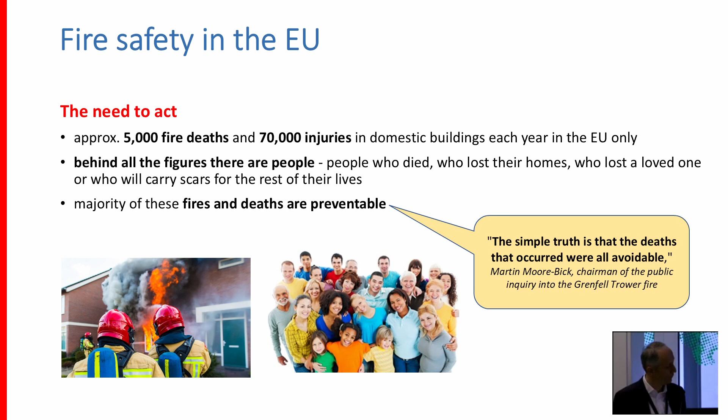Okay, and now I'm going to focus on only a few challenges, but they are, I could say, real game changers.

The first one, energy transition. Of course, energy transition brings a lot of benefits to all of us. Sometimes we are not even fully aware that we benefit from this process. But at the same time, it brings new and sometimes changed fire risks. And it's not difficult to imagine what would happen if we install, for example, PV panels, EV charging points, heat pumps, energy storage systems in our house, and it's installed by an incompetent installer, and connected to electrical installation that is obsolete and not totally adapted to these purposes. Probably it's not difficult to guess what will happen.

Another item, also an element of the energy transition in fact, but I separated it here on purpose: modern methods of construction. New building materials and new construction methods aiming to achieve higher energy performance and sustainability also have an impact on fire dynamics and make the fire environment less predictable. Once again, at this point, there is a really high risk that an energy renovated building will become more dangerous for the people inside it than before the renovation. And in such a situation, the whole process does not make sense.

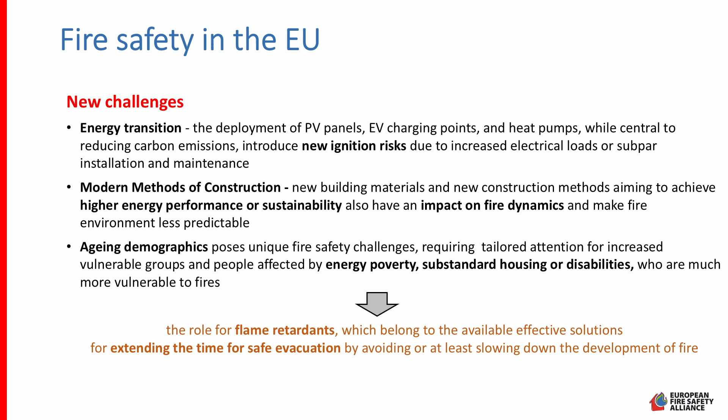And many people ask the question, what can the European Union do to improve fire safety? First of all, we should remember that fire safety is primarily addressed by building codes, and building codes are a national competence, and undoubtedly it should remain like this. Member states should have the right to shape their own regulations on the issue. But what is very important, building codes don't cover many important fire safety aspects, for example fire awareness, some elements of prevention, fire statistics, research, market surveillance, or information exchange.

And based on our experience, we quickly noticed that the EU institutions have both the potential, and should also be interested, to coordinate and support member states, because fire safety impacts and is impacted by several of the EU's core objectives, mainly concerning the energy transition and the new policy on housing, but also tourism, environment, human health, or consumer protection.

European Union institutions offer also a unique perspective which can enrich and strengthen the development of knowledge in the field of fire safety and help to address common challenges across member states, because most challenges and most fire safety problems are in fact common, the same across the European Union.

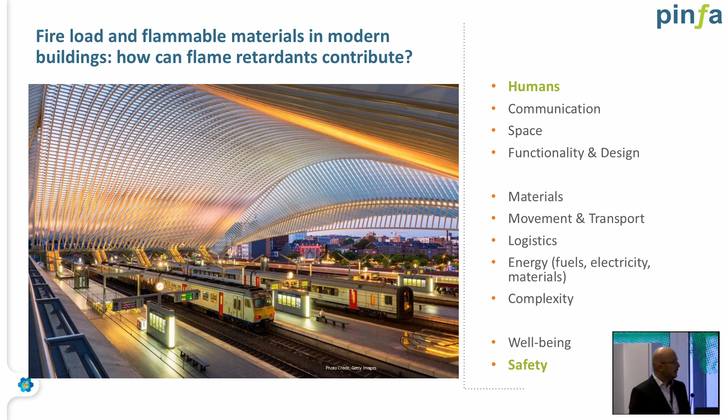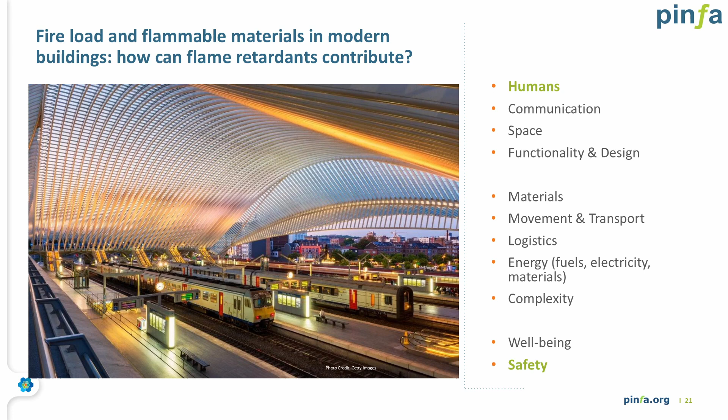We have heard that before: there's fuel, electricity, and burnable materials. So overall, we have high complexity in such a building, but we need to take care of the well-being of people, and we need to take care of safety in such buildings.

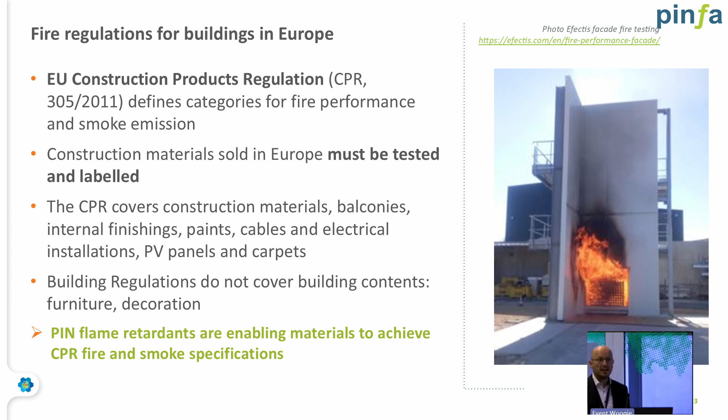But looking at fire regulations for buildings in Europe, we have standards, and that's very good already. It's the EU Construction Products Regulation, and construction materials must be tested and labeled according to this EU Construction Product Regulation. It covers materials like balcony, internal finishing, paints, cables, carpets, and so on. But it does not contain all materials which are present in buildings. And here flame retardants play an important role because these flame retardants are enabling materials to achieve these CPR fire and smoke specifications. To remind you, PIN flame retardants are phosphorus inorganic nitrogen flame retardants.

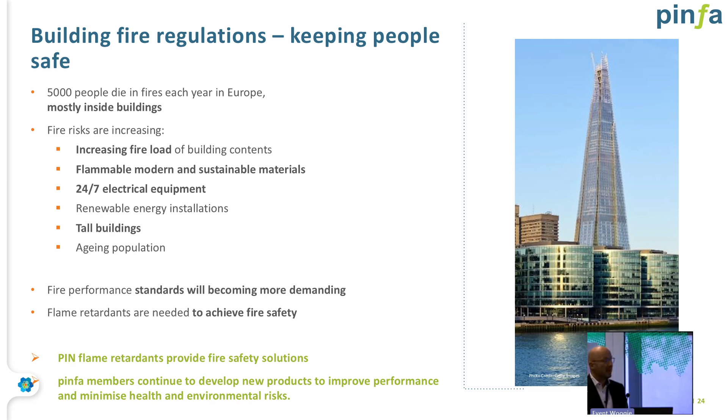Buildings are getting taller, and there's also an aging population. So the fire performance standards need to become more demanding, or will be becoming more demanding. And that's a task also for flame retardants and for the flame retardant producers, to achieve this fire safety with the products developed and provided. PIN flame retardants provide already today such fire safety solutions.

One very important aspect of flame retardants, and we heard that in the presentation before already, is that flame retardants are increasing the time to flash over. This means people have time to discover the fire. They can also alert other people. They can take decisions. They can take own actions to extinguish the fire. So this winning time is a very important role that flame retardants are having. They give the time for people to escape and more time for these activities shown here.

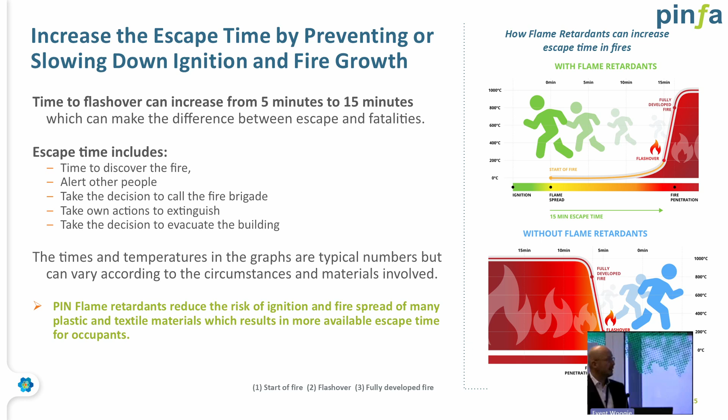PIN flame retardants are reducing the risk of ignition and the fire spread of many plastic materials, also textiles, and that's resulting in more available escape time for the occupants.

And here's a wider summary of why flame retardants play a crucial role in modern buildings. So there is not only the increased escape time, there's also fire prevention and fire control, because flame retardants stop fire or prevent fire from the very first ignition moment. For example, if you have a shortcut in a cable. As well, flame retardants are decreasing the smoke emissions. Smoke is responsible for many fatalities in fires. And it's also very important that flame retardants are reducing the total heat release. And with reducing the heat release, you can also reduce the damage if you have a fire.

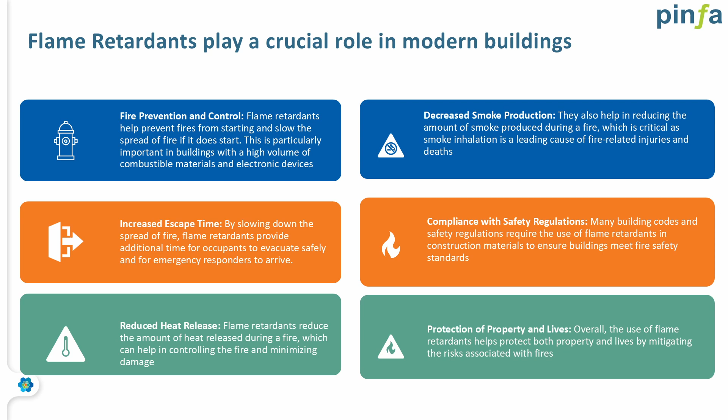The future challenges, we also heard about it: e-mobility, for example, the increased use of electric vehicles, for example, parking garages, or cars which are close to buildings. They are also having certain risks. The digitalization, the growing integration of digital technologies in buildings, demand higher energies. So the consumption of electrical power will raise, and this also will raise the risk for fires.

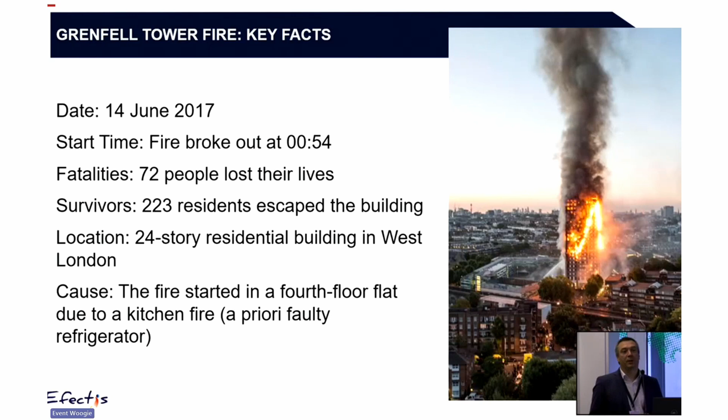The cause is, I will say, a very simple fire in a kitchen—something that may occur in the life of a building, something that may occur in the life of any building. But here, what made it go from something insignificant, a small fire inside an apartment, to a catastrophic fire—the fire started on the 4th floor and spread rapidly to the facade from the exterior. We had the first propagation, a vertical propagation, during 30 minutes.

At the time, imagine each story has 6 apartments, with the same floor plan on every story. At that time we have a column of fire on the facade in a limited part, vertical, and we have no fatality in all these apartments because everybody at home sees the fire on the window and goes out. But afterward, you have a horizontal propagation of this fire, and this horizontal propagation trapped people in their apartments.

We will see why, because it's also a question of materials, a question of penetration of fire, a question of why we had such material on the facade prior to the disaster, but also during the disaster, how it was managed by firefighters. This point is very important because this is the first time I've seen an inquiry that also focuses on the responsibility of firefighters.

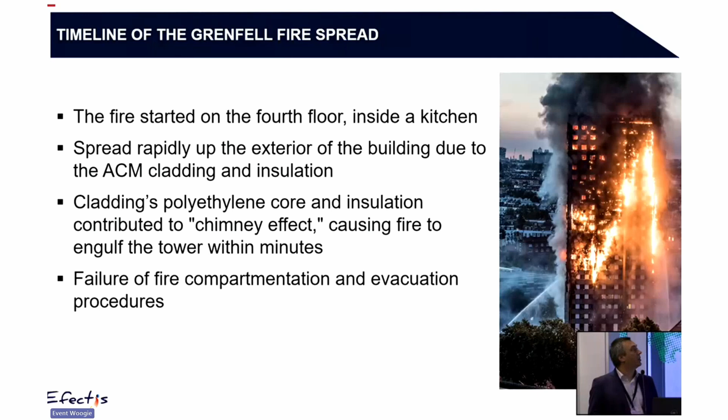So the choice of materials was important in that, and there are a number of failures—for sure, failure in compartmentation inside the building, and failure in evacuation procedures also.

But it was not a single event. We had previous cases with such kind of materials, including ones in UK. The use of ACM panels were already highlighted in some fires with fatalities, including one that is well documented, which is Lakanal House in 2009, in London also. And this fire is very important because it has been judged, and the responsibility of firefighters in their procedure was highlighted for this fire. We will see later, but it's very important in the complete understanding of the fire, and of the responsibilities, that they had previous alerts.

The regulator also was alerted from this fire, and they didn't change the regulation. So it's a point that is important, the responsibility of regulators facing the different events.

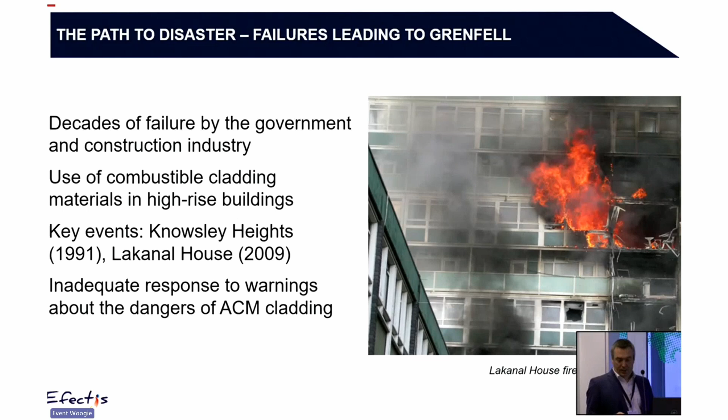There's also a controversy in the regulation itself, how it's built in UK, because first they have a building permit called Approved Document B. It covers fire safety, and there's a section B4 that covers the building envelope, and so covers the facade. What is highlighted in the report is that there's a vague wording of that, so it's not precise enough. It leads to too many interpretations, too many possibilities of interpreting it in the way it arranges you.

Martin Moore-Bick says, okay, this document is the base of the application of the regulation, but it's not precise enough, so we can have misunderstanding.

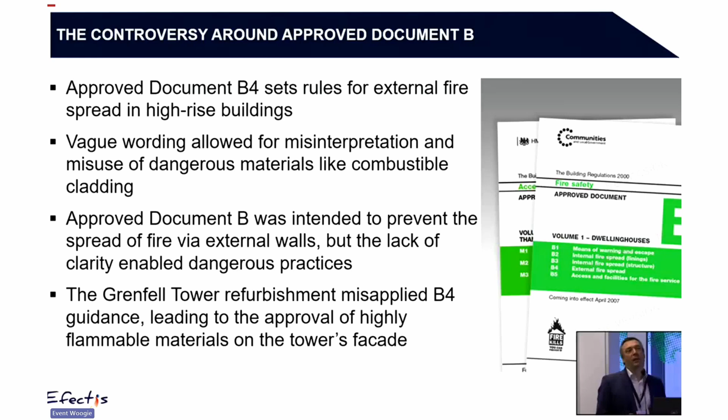We had several reports during this inquiry, especially technical reports from Professor Bisby and Professor Torero, and they demonstrated that the ACM cladding was the primary key of the propagation, and there was an interaction between this ACM cladding and the insulant, but mainly because it was insulant, not necessarily because it was a combustible insulant. So it means that to understand the behavior of the facade, you have to understand not only individual components, but also the assembly, the system, and how it works.

It's very important, I think Eiki, you will deal with facades later, but it's very important because the facade is not a construction product, and it's nationally regulated. So what is a facade? It will depend - if we ask in the room, everybody will have a different definition in this country.

Both experts concluded and agreed on this performance, and they rejected also some tests that have been asked by the police, the Metropolitan Police of London, for the inquiry and conducted at BRE, because they felt it was not representative enough of the situation. So it means that police used millions to make some tests, and they were rejected by this inquiry.

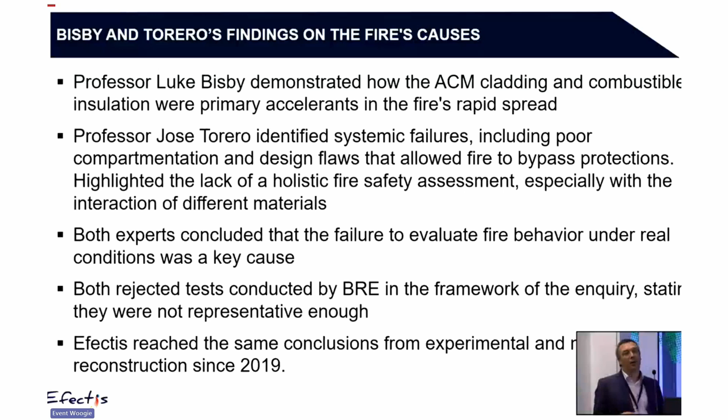For the main conclusions, we reached effectively the same conclusions since 2019 by some tests and also some numerical modeling of the facade. And we were able also to see what were the key parameters - for example, if you change the insulant, if you change the cladding, what is the effect on the overall safety?

So then the report goes to each player and their responsibility. As I said, we can comment on all of them, but it's not my personal view, it's really what is in the report. First of them is Studio E.

Studio E was the architect of the Grenfell refurbishment, and they are really attacked in terms of their incompetence dealing with fire. So it means that they chose to change from zinc cladding to ACM-PE cladding without any safety concern, just for cost reasons. And this decision was made totally - so it means that as an architect, we can say okay, he has perhaps no competence in fire safety, but he has to know and to address proper companies or advisors and so on, but he is responsible for the choice that is made for the construction. And here, it's highlighted that they were so incompetent that they were not conscious that they had to ask to someone.

So it means that if we generalize, we have to educate architects. We will see, I think I will mention education very often, but professional education of people like architects - they don't do art, they have to ensure the safety. So it's very important here.

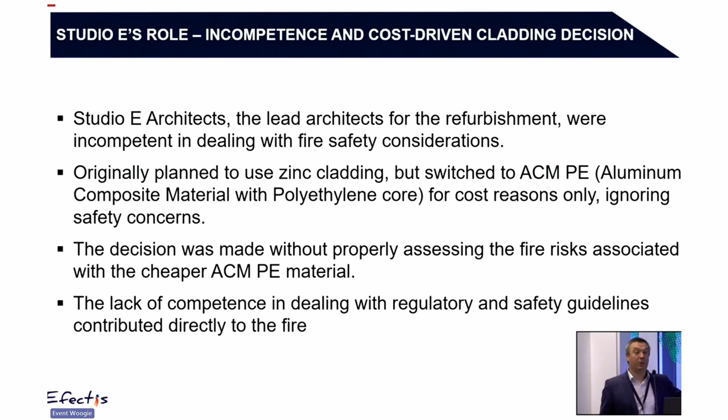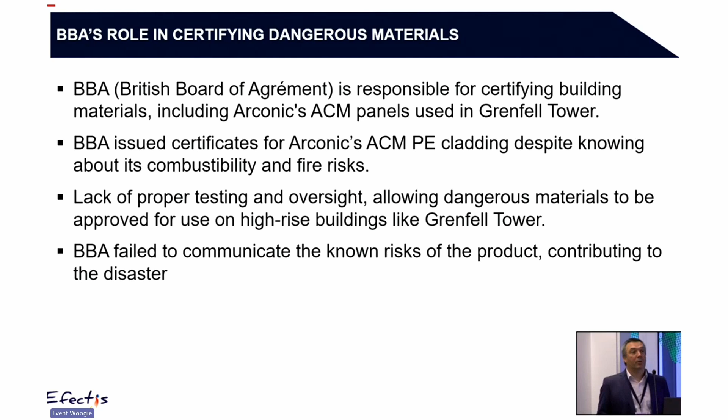There's a responsibility that is highlighted on the government. We saw other fires, we saw the Lakanal fire several years before. We had other alerts with other fires in other countries, not in the UK. And so the UK government, the English government—because this is English regulation, it's not the same in all 4 nations of the UK—they missed the opportunity to regulate combustible materials.

They also still used, in parallel to the European system, former national classifications. So you can go in deep in the report, you will see about class 0 or class 1 results of tests for these materials that were used. This is a former UK test method, stated in BS 476 part 6 and 7, and it was not adapted to represent the risk of such kind of facade system.

As soon as this system was reproduced and tested during the inquiry according to facade test, it failed. So it means you cannot summarize the behavior of a facade to some component tests limited in size, without considering the size effect, the mounting effect, and all the system effects. It's very important because here they say the government missed all these points—they just say you have to have class 0 of your material, and it's a surface test on small components. So it's really unadapted.

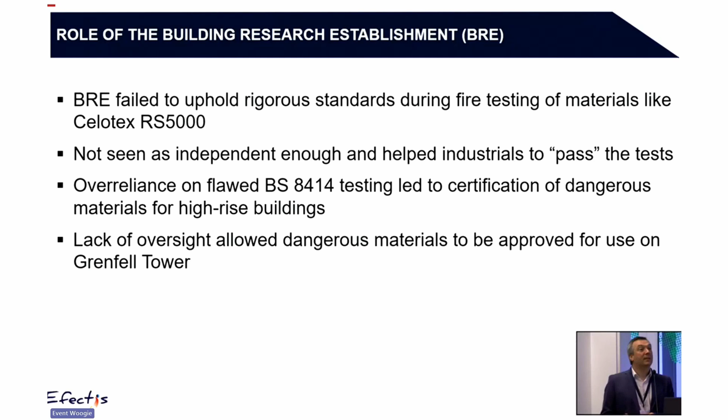It has to be more independent. It has to just say if it passes or fails. So it's very important for all testing laboratories in Europe—we have to be independent from the product. This is very important because it's really a public body at the beginning, and here the responsibility is highlighted: they allowed some systems to pass the tests without giving the good advice for safety. They just gave advice to pass the test.

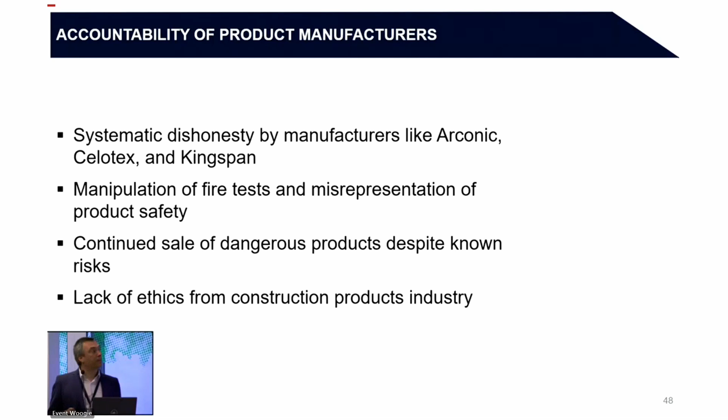London Fire Brigade—as I said, the report focused largely on firefighters, prior to the fire and after the fire. Prior to the fire, they say you had previous fires. In the judgment from the Lakanal House fire, they were asking to change their tactic because they had a stay-put tactic on dwellings. At that time, in 2009, the judge said your tactics are not adapted, and they didn't change anything.

And you can go see all the videos of the interviews. You had the chief of Fire Brigade of London that is in the tribunal, tearing up, just saying that yes, they didn't change anything. And she was fired for that.

So it's very, very important. Just because there was a previous event, they were asking to change the tactics and they didn't do anything. And during the fire, the stay put strategy was not understood. It's written in the UK regulation at that time, if you have a dwelling fire, just maintain people in their apartments during the time firefighters fight the fire. It's written like that, I think, in almost all European countries.

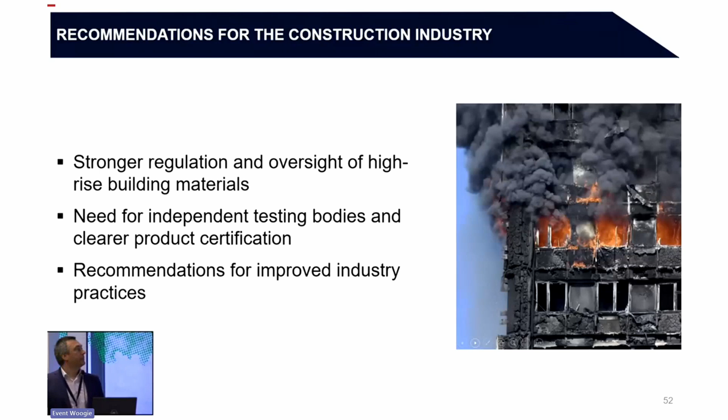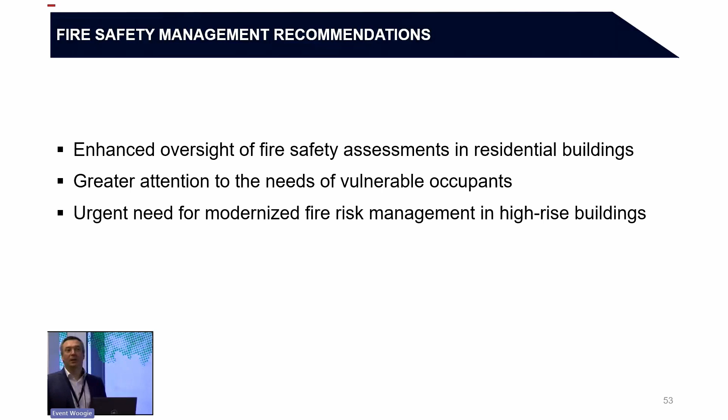And fire safety assessment in residential buildings, and better attention for vulnerable occupants. When we say we will go to an evacuation of a building, we have to consider the vulnerable occupants. And modernization of the fire risk management in high-rise buildings, prior to the fires and also during the fires. What is the strategy when you arrive at the building during a fire? What is the strategy? Do you evacuate? How do you evacuate? And so on.

And so a few conclusions about that. So now, next steps. What Martin Moore-Bick says is that the implementation of these recommendations is essential to prevent future tragedies. We have still, everywhere in Europe, some buildings with such kind of materials that are not adapted. This is what we saw in Valencia recently, but also in Milano, in Torre dei Moro. So we had several other alerts in other countries.

So we have to take that seriously for existing buildings and for the new ones. There's a need of collaboration between all the players, and especially an adaptation of the fire safety standards in the different high-rise buildings. So that's all. As I said, it's very thought-provoking, what are the conclusions of this report. But we have to take that as a lesson for the future, and the future of our regulations at each level, from material to firefighters and so on. Thank you very much.

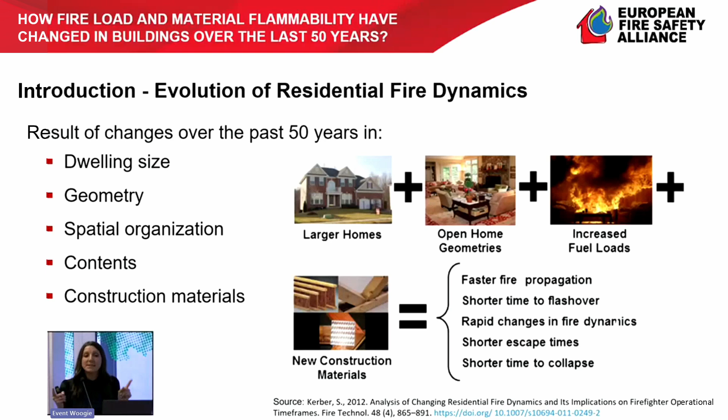Higher fire loads result in fires that are hotter, faster spreading, and more intense than those in traditional dwellings, impacting both the safety of occupants and the response time available for firefighters.

The focus of our study was the assessment of fire load densities in 3-room family apartments located in residential buildings and houses in Serbia. We surveyed 120 apartments, and we used a combination of weighing and inventory methods to collect data. According to Serbian standard, fire load is calculated based on the volume of combustible substances and their specific densities and net calorific values.

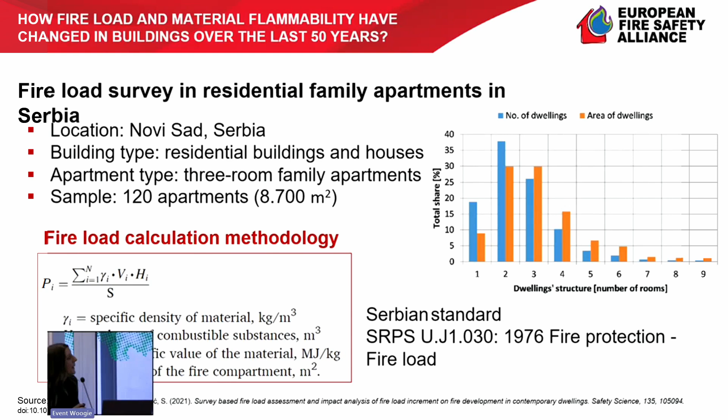Our findings were notable. We noticed that fire load density in these apartments has doubled in the last 40 years, rising from 300 to 700 megajoules per square meter of floor area. This increase is primarily due to the widespread use of synthetic materials and also changing trends in interior design that prioritize comfort and aesthetics, but often use more flammable materials.

We compared our results with other research results and also the prescribed fire load density values given in various standards. Our values are comparable, similar to values presented in Eurocode 1, which are based on 30 to 40-year-old fire load density studies.

The fire load values obtained in studies conducted in the USA in the 1970s and in Canada 20 years ago are comparable to results obtained in studies in Serbia in 1985 and in Finland in 1966.

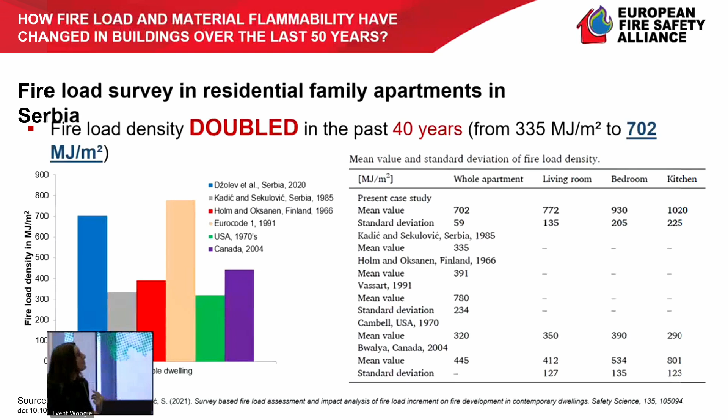In order to understand the impact of this increased fire load, we conducted a numerical study using the OZone computer code. The parametric analysis simulated fire behavior under various conditions, including different compartment heights and opening sizes, and also variation in fire load densities. We concluded that higher fire load leads to a higher duration of fire.

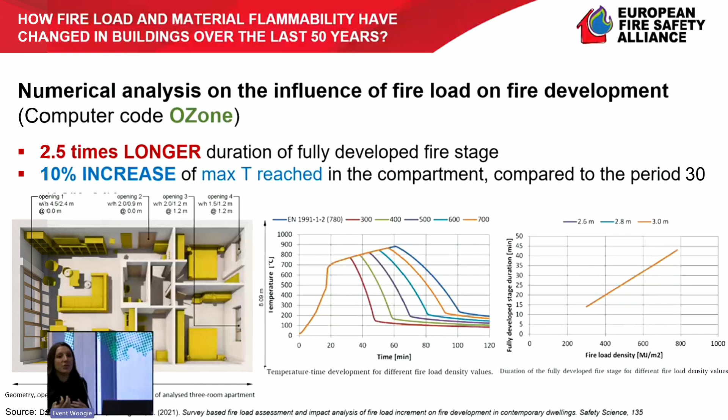In fact, now the fully developed fire stage lasts 2.5 times longer than it did 40 years ago. We noticed an increase in maximum temperature in the compartment, which increases by around 10% compared to the past. So we have increased fire load and higher maximum temperatures. This can lead to increased heat penetration to the structural members, causing higher degradation of their mechanical properties and increasing the risk to the building's structural stability.

So despite these changes in fire load and flammability, we haven't actually seen a corresponding increase in the number of fire fatalities or incidents. This can be attributed to a few key factors. First, fire safety codes and building regulations over the years have improved, requiring stricter fire protection measures. Also, advances in fire detection and suppression systems have played a crucial role, as has the implementation of fire-safe building designs and materials.

We've also seen increased public awareness of safety and the evolution of firefighting technology, making responders able to respond more effectively to modern fire challenges.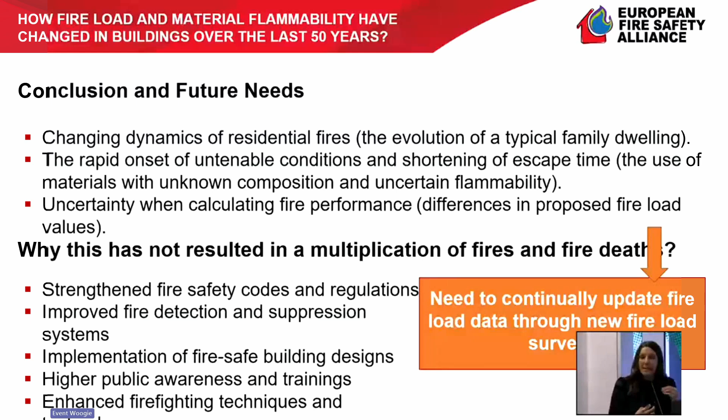In conclusion, our research highlights the importance of continuous monitoring and updating of fire data, including data on fire load, to keep pace with changes in building practices and building materials. Future fire safety research and policy adjustments are essential to adapt to modern fire risks and ensure our homes remain safe as building technologies evolve.

Thank you very much for your attention. I hope this presentation provided insight into the evolving fire risks in modern dwellings and the steps to mitigate these risks. Thank you very much.

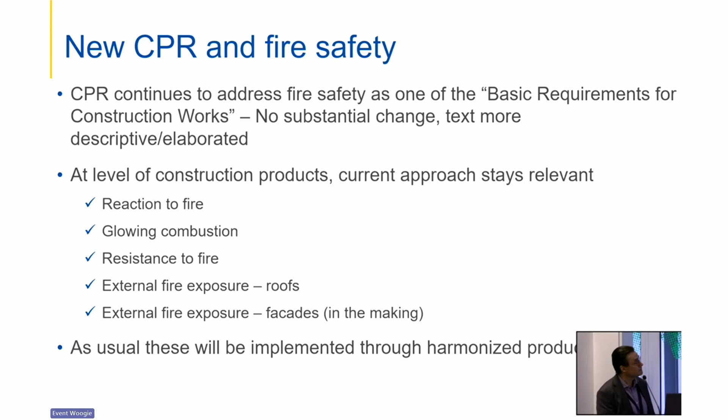Now let's take a look at the projects that we have had.

We had the first phase of the European Fire Statistics project, which ended at the end of 2022. We had already heard of the importance of harmonized fire statistics, and this was the first feasibility study on the issue, looking at what should be the way forward. Now the European Parliament has reserved an envelope for continuing this work in a preparatory action, and we hope to launch that in the first half of 2025, which means we will actually test the concepts developed in the feasibility phase in actual application.

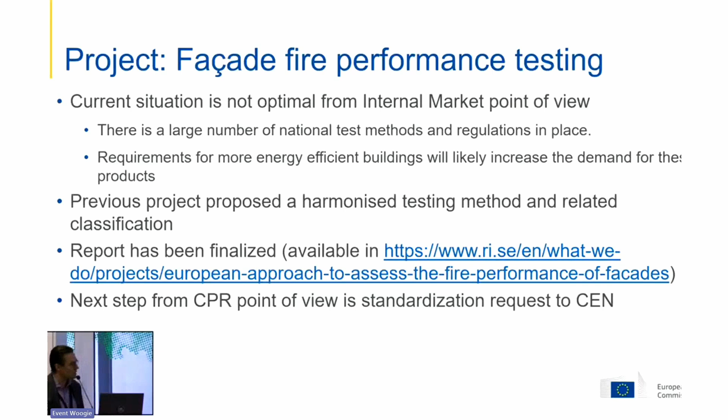Another important project is the facade fire performance test methodology development project. This project was finalized just a couple of weeks ago. The final report and executive summary are already available on the project website, though not yet published by the Publication Office of the EU. The follow-up will be that, in the context of the CPR acquis process, GROW is going to initiate a harmonized horizontal acquis group for fire issues. One of its first tasks will be developing a standardization request for the testing method of facades. Once standardized, it can be implemented in the relevant product standards, for example for ETICS, as one of the essential characteristics to be looked at. This work will start in the beginning of 2025.

Now, coming to the non-regulatory sphere of our activities: the Fire Information Exchange Platform, or FIEP, as we know it. It was initiated in 2017 after the Grenfell fire tragedy, with the aim of exchanging experiences and knowledge on fire safety practices, with a specific focus on domestic fire safety.

You will find these five broad areas of interest that FIEP focuses on in its activities: fire statistics, new products and high-rise buildings, experience exchange from fire accidents, etc. This is the basic field where we are working in this context, but it's not limited only to this. So if there are possibilities to learn from different areas, we will of course take a look at those aspects as well.

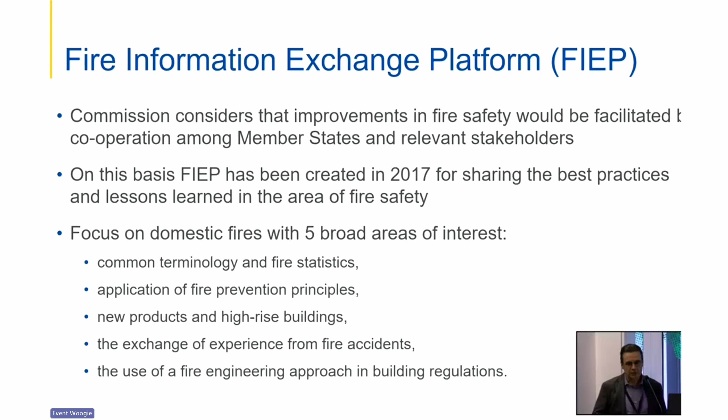There have already been exchanges on interesting and important topics we've been discussing this week, like photovoltaic panels or e-vehicles and car parks. Specifically on e-vehicles, this was done in collaboration with DG Move, who are now working on guidance to be published under the EPBD directive for member states. FIEP was also active as a kind of validation panel for the findings from the work done with consultants and DG Move, so FIEP contributed, for example, to the review of existing rules and regulations.

The same type of activity and role for FIEP is also foreseen with the implementation of the EPBD. So it might be that in the near future we will have another webinar on photovoltaic panels, and FIEP members may receive documents to review and comment upon. We don't yet know what the actual concrete measures will be, but it has already been agreed with colleagues in DG ENER that this platform will be involved in developing the guidance they need to provide under the EPBD directive.